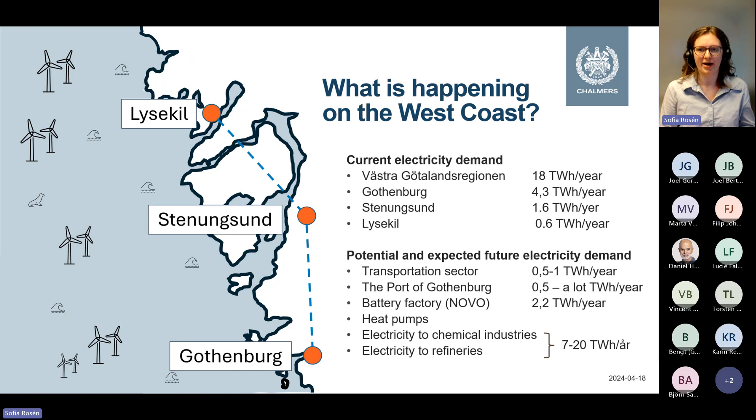We also have new establishments, for instance, the battery factory, which is also going to be approximately 2.2 terawatt hours per year. And then we also have the connection to the heating sector where electricity can be used for heating. So these industries are on top of this, and we can expect somewhere from 7 to 20 terawatt hours per year. And that is if we produce the hydrogen from electrolysis. So not only did we want to see what happens in the individual nodes, but also how they may collaborate. And these industries are the main focus of my study, to see how it affects when we add this demand.

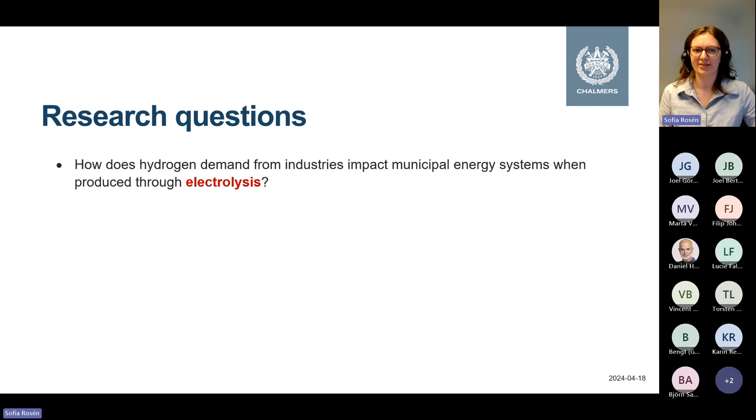So the research questions in the study are: how does hydrogen demand from industries impact municipal energy systems when produced through electrolysis? How could regional collaboration in trading hydrogen through a pipeline between 3 industry-intense nodes impact the energy system configurations? And does the role of sector coupling depend on whether the demand for hydrogen is met locally or through regional collaboration in the form of a pipeline?

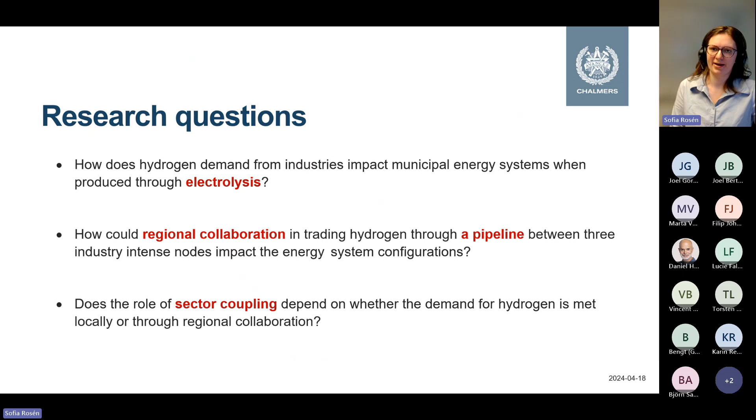So if we look a bit closer at these 3 areas, they differ in more than population size and annual electricity demand today. They also have different availability of import capacity from the regional grid. And I should mention that these are the approximations for the future availability of grid import. They also have a different number of ongoing offshore wind farm projects. So they are represented here in the figure.

So outside Gothenburg, we had one smaller and one larger that were a bit overlapping. While in Stenungsund, we have one offshore wind farm project going on, and outside Lysekil, we have approximately 3 along the coast. So we have some availability of electricity from that. We also have solar PV park availability that's based on available land area, and rooftop solar PV availability that is dependent on the number of people living in the cities and, by extension, the amount of buildings.

Sofia, just one question that popped up here in the chat. What year are these numbers for? What year? This? Yep. This is approximately, well, the plans are for the grid expansion to 2035, I think. But we model a future year around 2050. So this is what we know that we're going to get, but then of course there's a bit of a gap between what we know we're going to get and the year that we model. And the projects are ongoing and none of them are built today when it comes to wind farms, for instance. I hope that clarifies things for the person who asked the question.

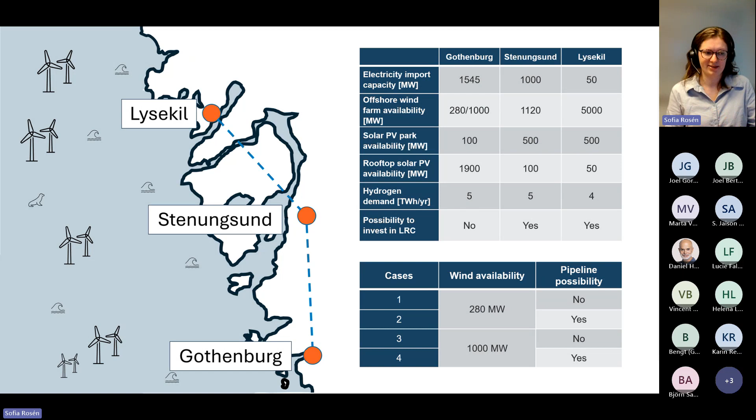And then we compare when we allow for investments in a pipeline and when we don't. And to be clear, that we allow for investments in a pipeline, we don't force the model to take a decision to invest in a pipeline, but it's just a possibility.

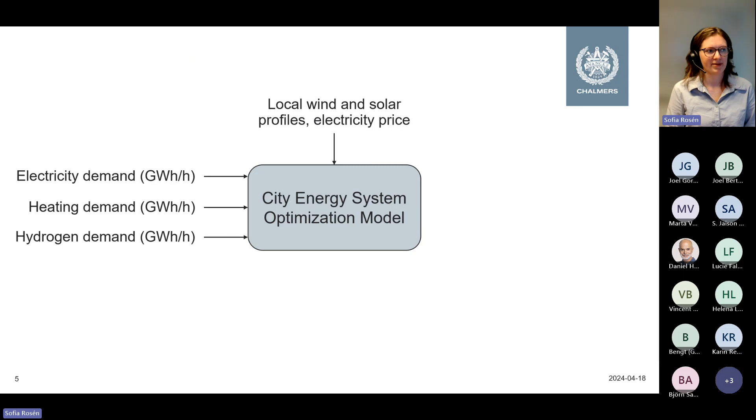Then we go to our model. So we gave it electricity demands, heating and hydrogen demands for each of the 3 nodes. Then we also add local wind and solar profiles as well as electricity price profiles for SE3. We give the model techno-economic data for different technologies to produce electricity, heating and hydrogen, as well as storing it. And what we get out from the model is investments and running patterns for the technologies invested in.

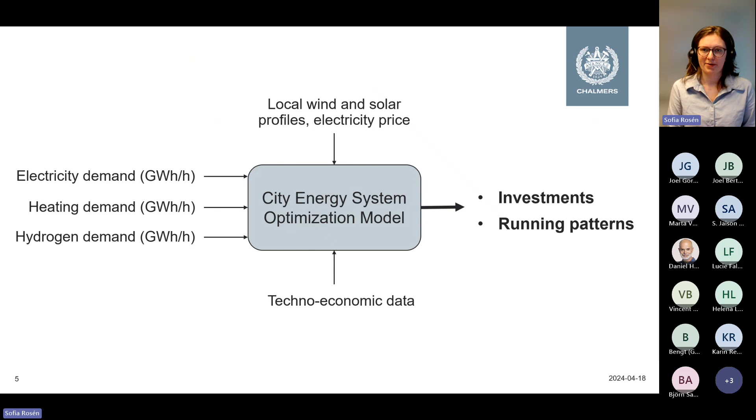So now I will move to the results. And here we see investments in electricity production. So this is how the results are presented. It is divided by each area or node, Gothenburg, Stenungsund and Lysekil. And then we compare with availability of the different wind farm sizes outside Gothenburg, so either a smaller one or the larger one. And then lastly, we compare with availability of a pipeline and without. So here we don't have the possibility to invest in a pipeline.

And then we see in Gothenburg that we get investments in wind power, PV parks, PV on rooftops, but we also have some combined heat and power plants, as well as combined cycle gas turbines. In Stenungsund, we have only wind and solar PV. That's also because relative to the demand of electricity within Stenungsund, they have quite a good grid connection, so they can balance the intermittency of these renewable energy sources. And in Lysekil, we have a lot of wind power, some solar parks, and then a little bit of combined cycle gas turbines, as well as some PV on rooftops.

And I can also mention that for all cases, the maximum PV park investment possible is taken. So it's always the maximum allowed investment in PV parks in all nodes and all cases.

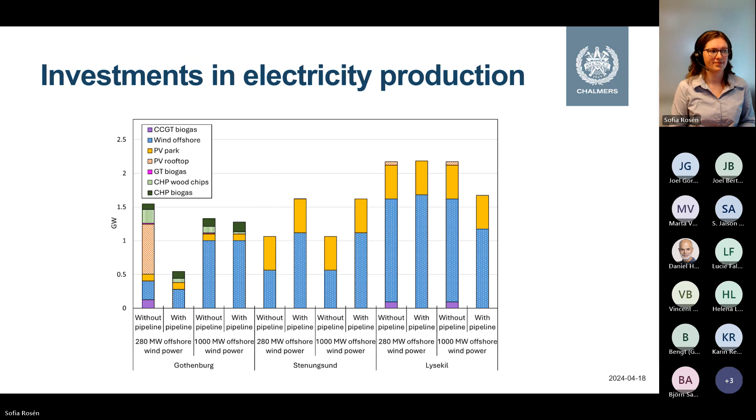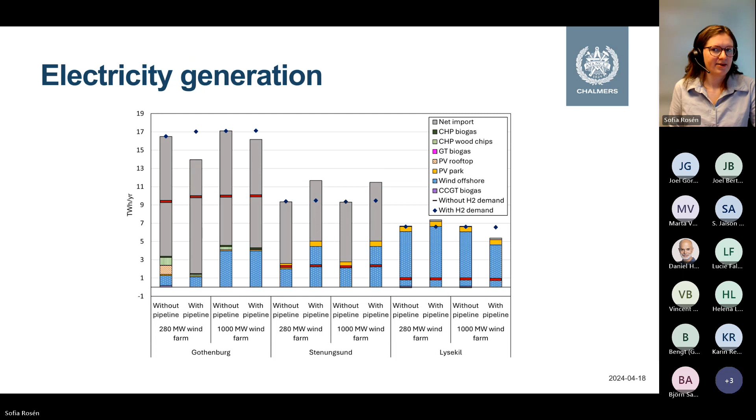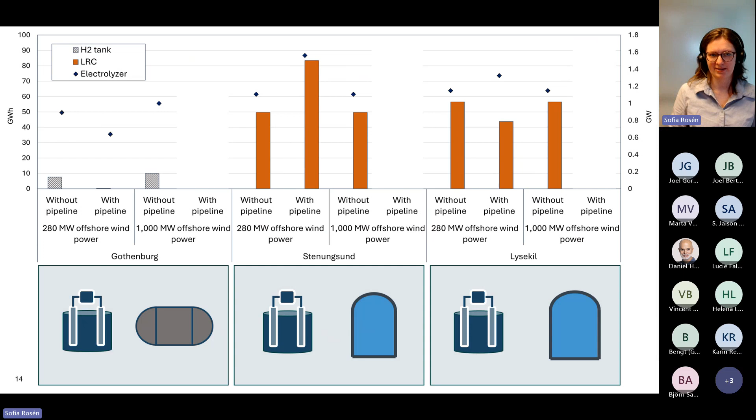We also see that in Gothenburg, we get a decrease in electrolyzer size, while in Stenungsund we get an increase, and an increase in Lysekil as well. And this also correlates to the additional investments in electricity production. When we have a larger offshore wind power farm, then we again see investments in tank storage in Gothenburg. Stenungsund and Lysekil are the same as in the first case.

And then when we allow for the pipeline, we see an even stronger trend towards Stenungsund being this storage that covers partly both Lysekil and Gothenburg's demand for hydrogen. And here what I find a bit interesting is that we see in Lysekil some interesting patterns: first we see an increase in electrolyzer size while the storage is decreased. And this is because in these cases with the smaller offshore wind power farm, Gothenburg imports approximately 40% of its annual hydrogen demand. So hydrogen is transported all the way from Lysekil to Stenungsund and Gothenburg.

But when we have more availability of electricity in Gothenburg, then Lysekil instead becomes an importer of hydrogen, and the pipeline helps to balance the local energy system, because then Lysekil doesn't have to cover for this intermittency of variable renewable energy sources by itself, but it can rely on Stenungsund that has, for instance, better connection to the regional grid.

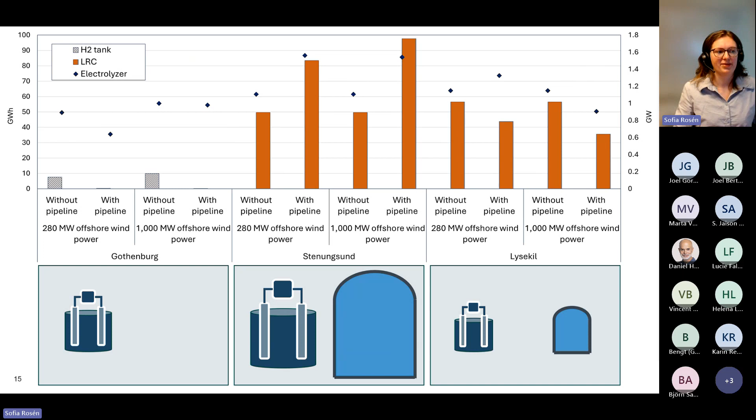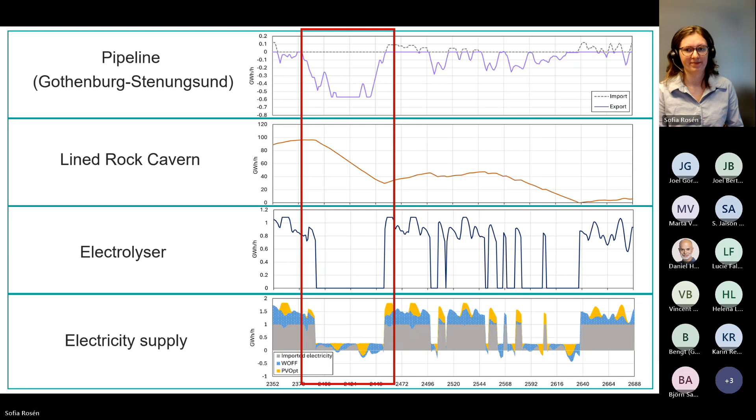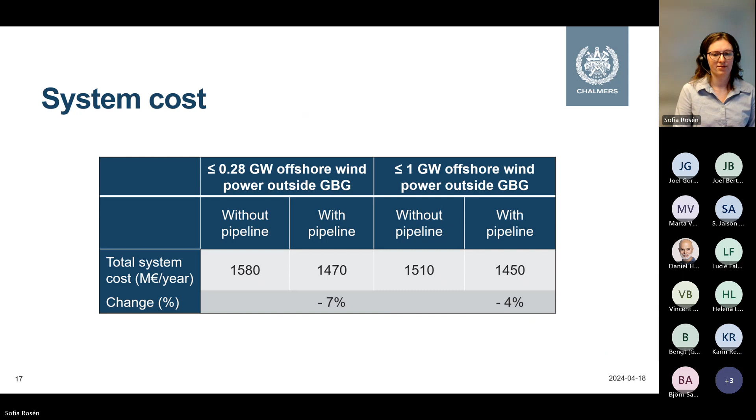And what we can conclude from this study is that meeting hydrogen from electrolyzers significantly increases the demand for electricity in the studied region. Regional collaboration through a pipeline lowers the total system cost, and the driving forces for collaboration are the different characteristics of the cities investigated.

So for instance, we had Gothenburg with a high demand, quite congested, limited VRE and grid connection. We have Stenungsund, who has a comparatively large availability of VRE and also comparatively large grid connection, and Lysekil that has a lot of VRE but restricted grid connection. And because they have these different characteristics, they can then help each other in meeting these demands.

And from here, this is the study I've been working on now. So we're wrapping it up. And then for future work, we're looking into how do we get there? Because as mentioned earlier, this is like a goal picture. This is 2050. This is when we don't emit carbon dioxide anymore. But we also need to get there.

And we don't know exactly in what order the industry will transition to make their processes without carbon dioxide emissions. And we don't know exactly when the offshore wind power projects will be built. And we also don't really know when we get this grid expansion to the regional grid. So we're going to see a bit more what happens and how that affects the system, and also how the pipeline correlates to it.

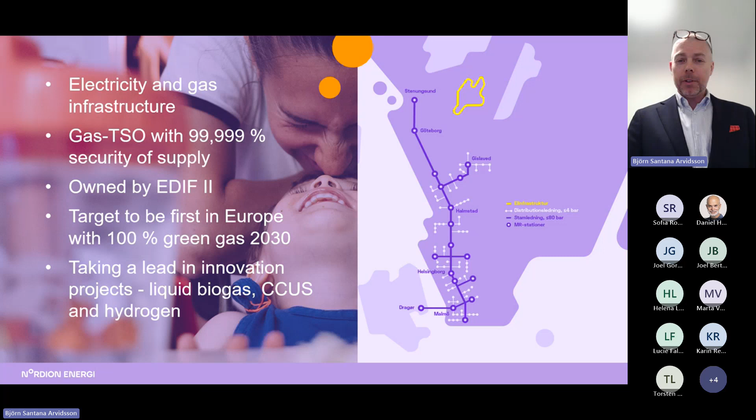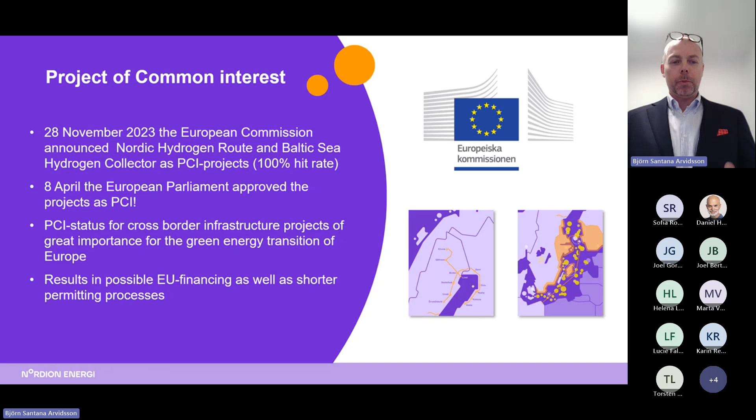The need of hydrogen. We see a lot of PowerPoints. There's a lot of communication around hydrogen, but we wanted to find out on a confidential basis, so I cannot share all the details. What are the current concrete plans for locations with coordinates, timelines, capacities, both in production and offtake? What is it that we have currently in Sweden? So we have not just looked at the official numbers. We wanted to find out what's the truth.

And so far, the majority has been focused on the northern part of Sweden, SE1, SE2. But there's already now information about SE3, SE4 as well. So for now, this is the result by end of October last year. 29 companies with 50 concrete projects. And the numbers showing here add up to 55 terawatt hours by 2045 in consumption and 80 terawatt hours of production. But it starts already around 2028: if there's a connection between a producer and an offtaker, so you have a value chain, then that could be started already in 2028.

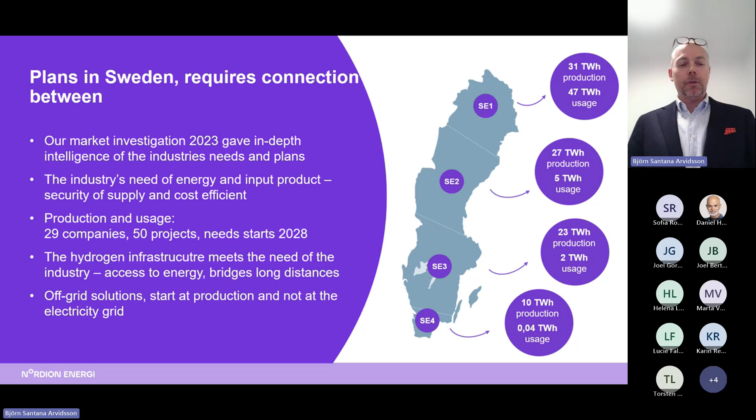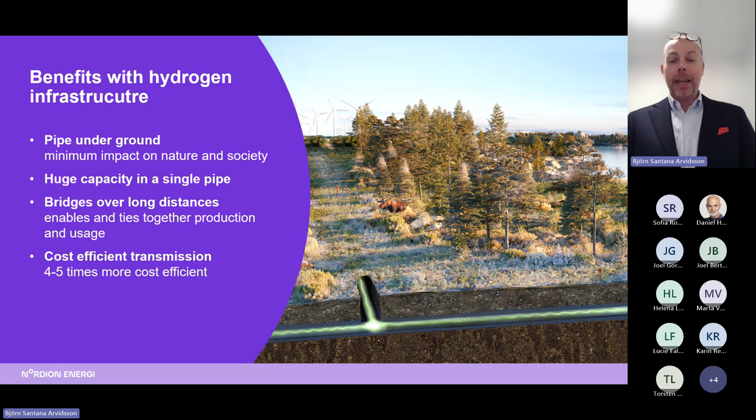And what does the infrastructure give? We can connect the different systems. We can complement the grid from Svenska kraftnät. So where there's a limitation to add overhead power lines, we can build the underground pipeline instead. We can also go directly to the source. We can go for off-grid solutions as well. So this is just showing it's underground, so it's not impacting nature and society more than when it's being installed. So the reindeer and the moose, elks can walk over it, you can still farm the land, etc.

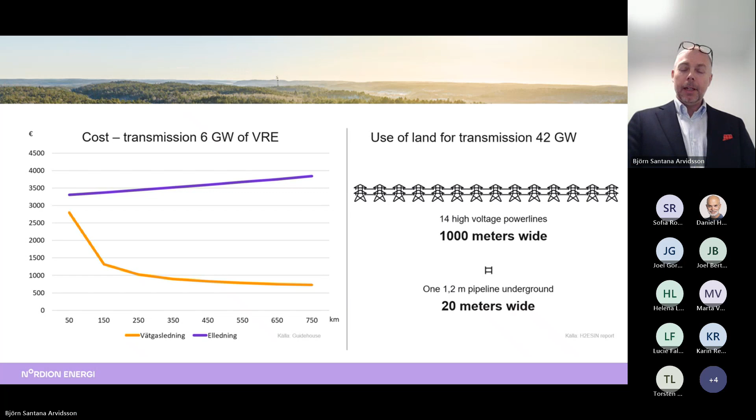And apart from being very efficient in space, with a clearance of 20 meters, you can have a 1.2 meter pipeline that transports the same amount of energy as 14 overhead high voltage power lines, to transport 42 gigawatts. So it's a huge capacity in a single pipe. So if you transfer that into a cost per unit per, I think it's 1,000 meters, the levelized cost of transmission of quite a big number, 6 gigawatts. But you see that as soon as you come up to like 100 kilometers, you have a very clear cost benefit compared to the normal system of using overhead 400 kV lines.

But what is very important, we don't say stop with electricity. This is super important. This is the backbone of the Swedish energy system. But what we need is to complement that into a new system where we can also more easily handle the volatility in supply of the renewable power production, and still keep the quite stable offtake need from the industry.

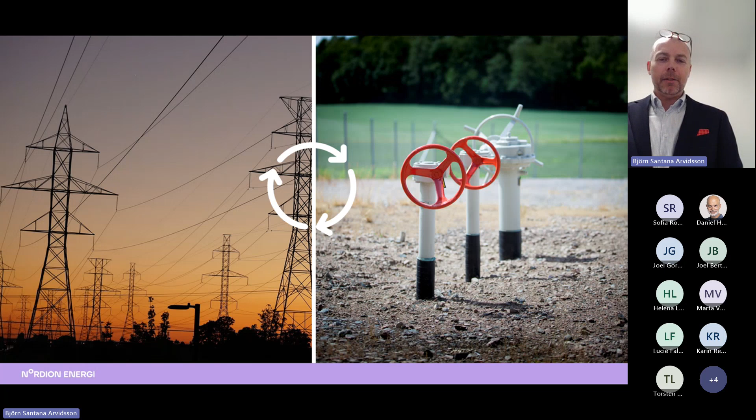So the projects, the Nordic hydrogen route is really to connect Finland and Sweden up north, where we have huge potentials, we have huge projects, but in order to get the balance between supply and demand, we need to connect it to a bigger system. We got the PCI status, we are just preparing the CEF application for getting additional funding from the EU. The power to earth is the first section. I will show that on the map next. We are then also using the input from the open season to really see where is the demand, how can we best have an infrastructure to meet that.

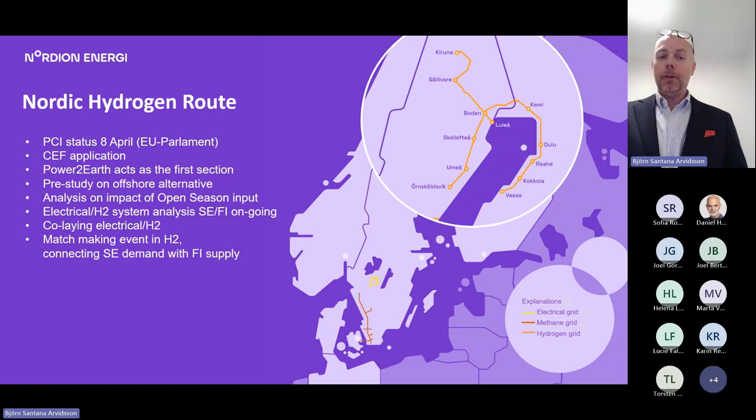So we have the coordinates. We have also spent a lot of time just in this coastal area. It's been more than, I think it's 60 or 70 meetings now with hundreds of people, talking to the municipalities. What are the needs? What is the local value, the regional value that we can create? We've also been working quite a lot on how to connect and do co-laying of electricity power lines and hydrogen pipelines, because we have that knowledge already today from the west coast of Sweden for the methane system. So we use the same kind of experience there.

So this is the part going from Letsi in Jokkmokk municipality down to Luleå. So this is the first section. There's a very good connection for power up in Letsi next to a hydro power plant. And we have an excellent opportunity with Fertiliser to build both the green ammonia and green fertilizers in Luleå and the Hertsöfältet. So we go and sort of pick up the energy where it's available.

We produce hydrogen and then transfer it in a 150-kilometer underground pipeline, which is then much easier to get into this narrow space between military areas and nature areas, different difficult geological conditions, etc. Then we get it to the port of Luleå with an excellent infrastructure as well.

We have already started the early consultations with Sami villages, with all the municipalities, with Länsstyrelsen. So the permitting for all the 4 parts, the grid connection, the hydrogen production, the hydrogen underground pipeline, and the production unit in Luleå, all the processes are now initiated. So we are moving ahead to reach an FID, to take a financial decision. This is targeted for end of 2025, to be in operation end of 2028. And this is a challenge, yes.

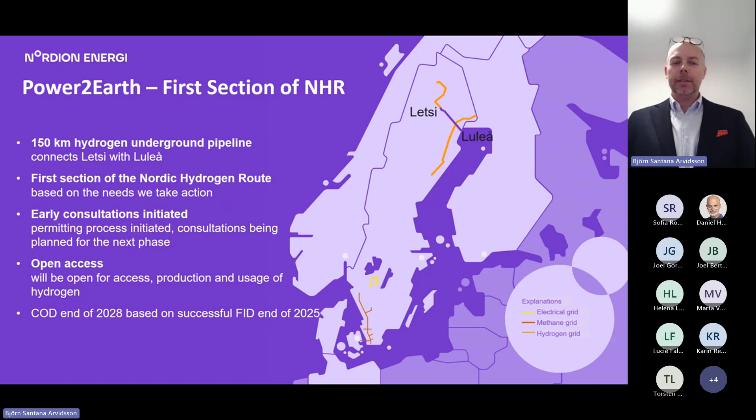This part, because it's the first section of an open system, needs from the start to be addressed as an open system. So the capacity should not only enable the Power to Earth project, it also needs to accommodate the future energy system, connecting up in the Malmfälten down to the biogenic CO2 sources along the coast, to really create a big new energy system. And this is really about accelerating and creating this new path of energy infrastructure up north. Because building huge power lines is a challenge up north. There's a lot of area, but very little space.

So we're developing the project with the 3 partners together, and we're driving this now fast forward together, and working quite a lot with keeping authorities on their toes. We have already agreed on the legal framework, even if it's not clear, even if it's not perfect. It's enough that we start now. We don't have to wait. We go for it.

I also want to touch on the Baltic Sea. I was in Malmö yesterday talking about offshore wind and hydrogen. So this is an excellent opportunity both on the Baltic Sea and on the west coast to connect offshore renewable power generation to a market. And one cost-efficient way to do that is to produce hydrogen and have a hydrogen infrastructure to connect it to a market.

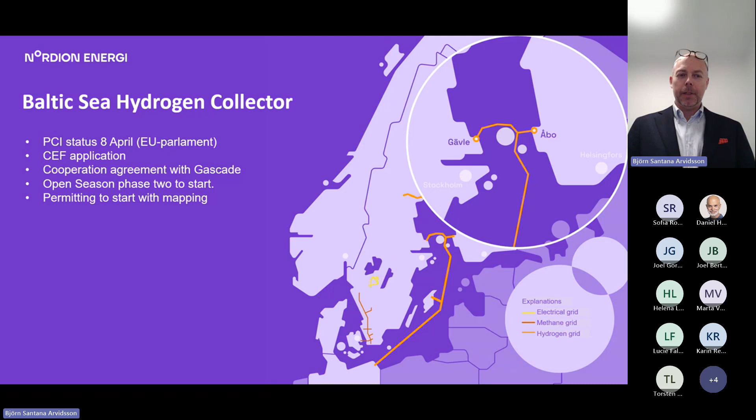This also has PCI status. It's a CEF application. We're also working with the TSO in Germany. So we have a great connection on how to build the energy system together. But it should not be to drain the energy that we are producing in Sweden. It should just be to secure the energy system, securing the supply, to make sure that we can go for the big green transition that we need to do in Sweden and in Europe.

West Coast. This is already where we use hydrogen. So I'm a little bit puzzled still that most people talk only about the northern part of Sweden. There's also great knowledge and experience, and Chalmers is showing that. I'm very sure that the fire brigade, the municipalities, the Länsstyrelsen, are already so aware of gases and explosive materials. So this is normal business. There's already knowledge about gas infrastructure, which currently represents 20% of the energy supply in the region on the west coast and Skåne.

There's also, as pointed out, a power capacity limitation in supplying electricity. So this is really where we want to see concrete projects and to start with partners to get from an initiative to a project.

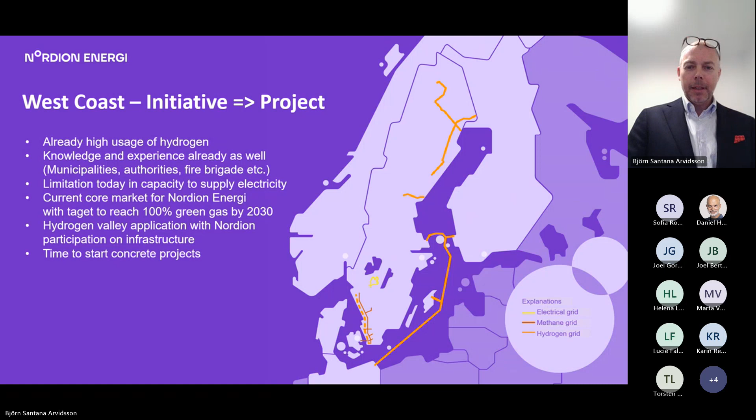Let's see. So what we want to see is really that we aim on the energy system that we need to reach the planning targets that the government has set in the proposition to reach the 300 plus terawatt hours by 2045.

So we need to connect, we need to make sure that we utilize the resources in the right location. So we're already working very closely with Svenska Kraftnät, doing system analysis and starting on the path of co-planning to make sure that we build where we have the right conditions for each system to combine that in a new system. And then, of course, the sector couplings, where we have biogenic CO2, where we have waste heat that can be used to replace district heating. Can we use the biomass for biogas production instead? So there's a lot of components that we need to have in place to make the right decisions.

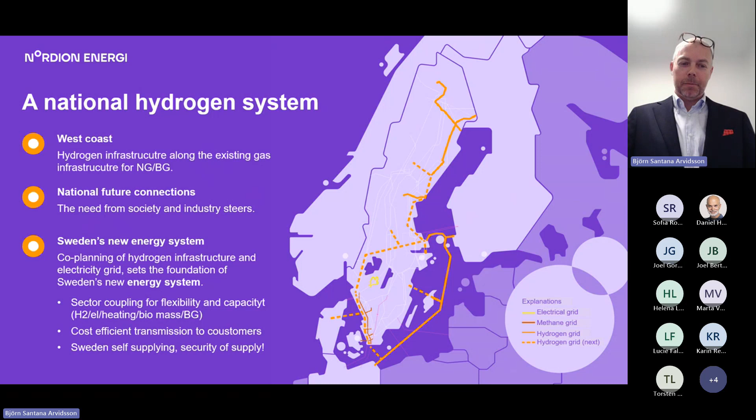And the Energy Agency report from the 26th of March was stating that we need to combine the knowledge and experience from methane with hydrogen. It's really a gas infrastructure, so keep it together. And we do have the knowledge, competence and experience within Nordion Energi to provide that, to secure that this is going in a good path forward. The rules and regulations are sufficient. They're not perfect, but we want to improve as we move forward and make sure that we do this co-planning in a consistent and very constructive way. So the conclusion is basically go now, and this is what we do.

And just the last point, Europe. We're a part of Europe, whether we like it or not. And we do have an integrated energy system already today. And we need to make sure that the future system for hydrogen infrastructure is also set in the right framework. So we are working now during this period up until June, together with the other gas TSOs in Europe, to put in place the ENNOH, the European Network of Network Operators for Hydrogen. We're the only representative from Sweden. And this is really to make sure that how decisions are made, what framework will be put in place, is something that is good also for Sweden. That should be ready before July this summer, and then be handed over to ACER. So do not consider to act. Act. This is really important.